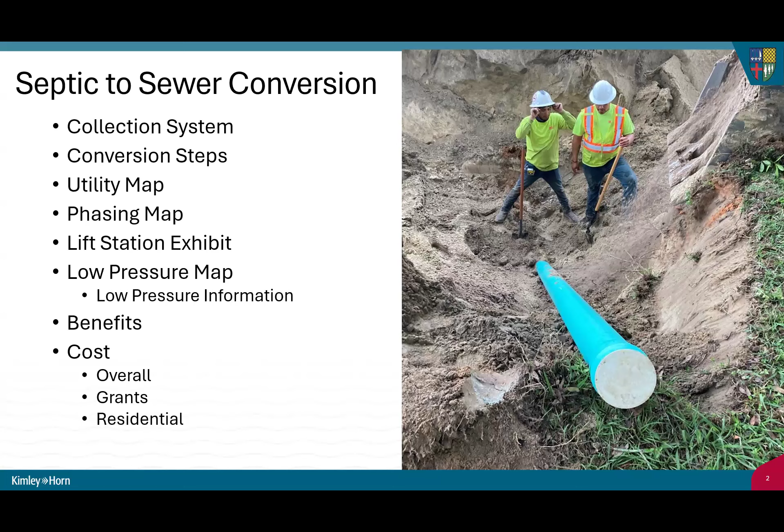We'll be describing the collection system components, the steps for converting from individual septic tanks to centralized sewer, showing a preliminary utility map, a recommended phasing map, a lift station exhibit, a low pressure map with some low pressure information, the benefits to connecting to centralized sewer, and go over some costs associated with it.

So the sewer collection system is made up of gravity systems, which are individual gravity mains and manholes, grinder systems, also known as low pressure systems, to help pump the flow over hills, and lift stations to send the flow to the wastewater treatment plant for further treatment.

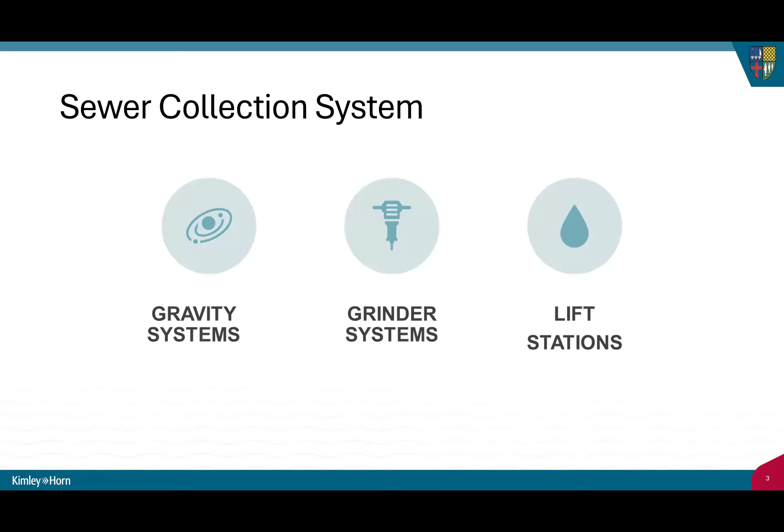Now the conversion steps will look like abandoning the individual septic tanks, connecting to the centralized sewer, installing lift stations throughout the town to pump the flow ultimately to Orange County Utilities' existing wastewater treatment plant for further treatment.

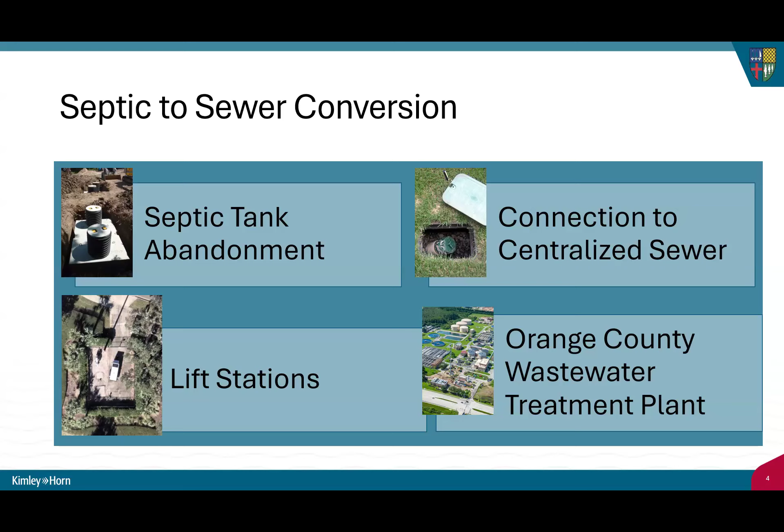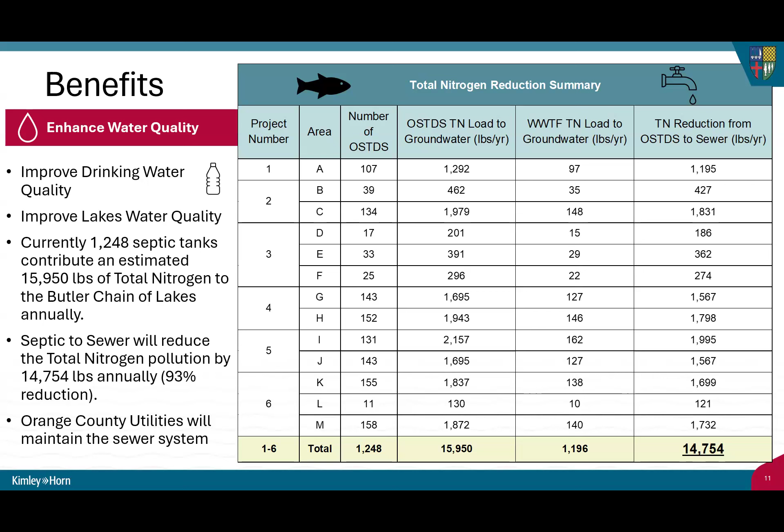Now I'm going to pass it on to my partner, Alan Gary, who's a technical expert in septic to sewer, to explain the overall costs and grants. Thanks, Briar. Happy to be here with you all tonight.

My objective in these next 4 slides is to explain the costs of the project to you, but also explain how those costs are not directly borne in their entirety by the town, and that's an important distinction to make. The slide in front of you has a lot of information on it. What we're trying to convey here is the 6 different phases that Briar talked about before, shown here in sequential order. They each have a varying number of septic tanks in them, but the number of septic tanks in them is proportional to what would constitute a good septic to sewer project.

We've incorporated into these cost estimates not just the collection system costs, but also the private property costs that might be incurred to run the sewer lateral from the house to the collection system and abandon the septic tank. So these are all-inclusive costs. On top of that, we include a 30% contingency because of the variability in the market we've seen, and the fact that we're probably several years out from designing and constructing these. We wanted to include a buffer.

Phase 1 has a $16 million cost. We've got 13 million for phase 2, 11 million for phase 3. Phase 4 is close to number 1 with 16 million. Phase 5, with the largest number of septic tanks—I'm sorry, phase 5 has a $19 million cost. It is more expensive than phase 6, which has the largest number of septic tanks, due to some of the difficulties with installation and the lift station locations.

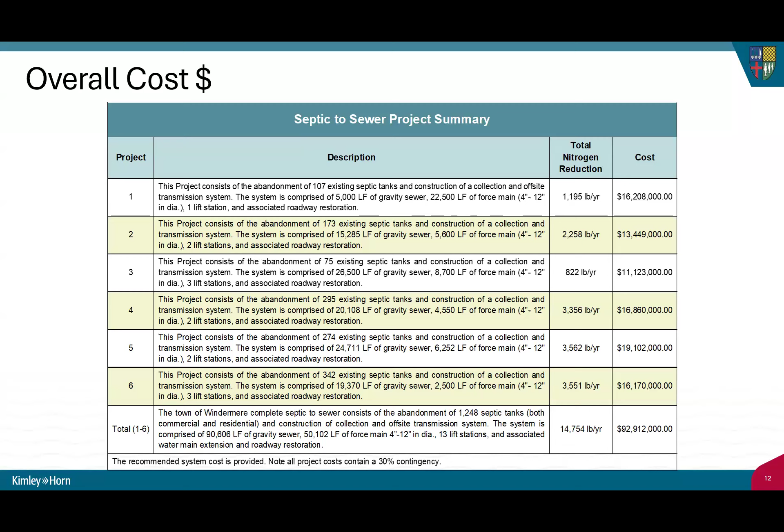My experience and our firm's experience with these projects is that overwhelmingly the vast majority of them receive something along the lines of an 80% grant-funded proportion, with 20% being paid by the township.

The grants have really been prioritized by the state and federal government to push clean water. Recently, Florida passed the Clean Waterways Act. The Army Corps contributes a lot of funding. There are federal clean water dollars available through the SRF program, and the Federal Clean Water Act also has some opportunities.

Now, that last one under the Federal Clean Water Act, the Section 319 grant program, is one I want you to keep in mind—I'll talk about it more on the last slide. But the point we're trying to make is there are a lot of funding opportunities available to you. The fact that your study got grant funded, in my experience, is a good indication that they'd be willing to fund the design and construction, the next phases of this project. This is an important water quality project, and I think the town has shown that it's proactive in trying to prevent nutrient pollutants to the water bodies.

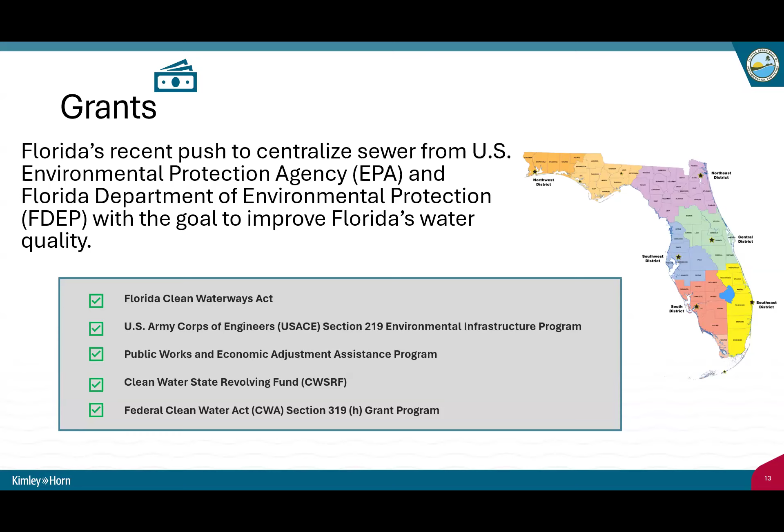Timing of the grant application is a factor in how much you might get. With a project like this, where we have 6 separate projects that can be broken up and phased properly, you're really looking at a septic-to-sewer program that can be funded through a multi-year grant. Several of the grant agencies I mentioned offer multi-year grant funding, so you only have to apply once. You get approved as a multi-year grant-funded entity, and then that grant is there and available for all 6 projects.

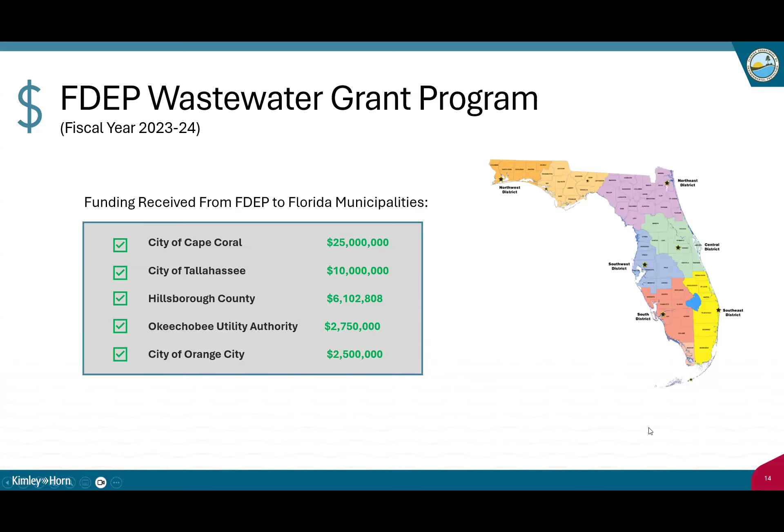Other costs a resident might incur, as I mentioned, are the construction costs on their private property to connect the house to the collection system and abandon the septic tank. With our typical projects, those costs usually run a total for the connection fees and on-site costs of about $6,000. What we've budgeted is for 10—again, we're overestimating a little bit at this stage just for market variability.

Now, remember that 319 grant I said to keep in mind—that particular grant is specific for covering these types of costs, the ones residents would pay. It doesn't pay for the collection system, but it will pay for the on-property costs. I've got several projects I'm working on right now where we've been able to take advantage of that grant, and the residents actually had no out-of-pocket costs. But as I said, the average across the board we've seen is about $6,000 total that a resident might see.

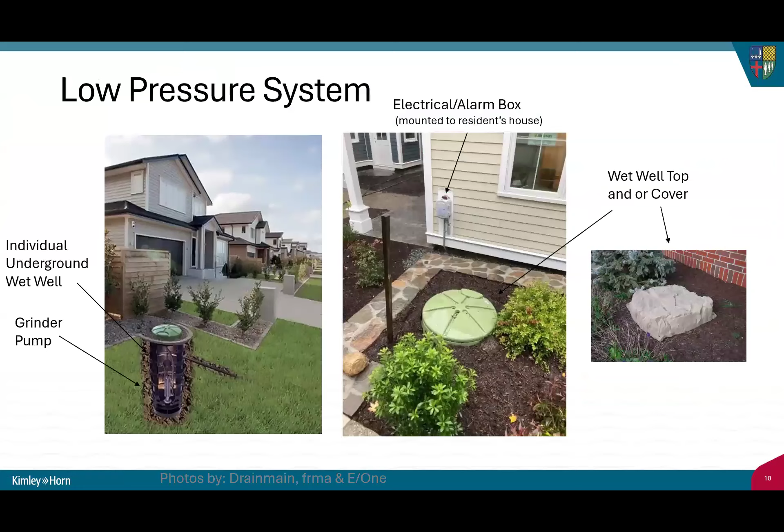Okay, and could you guys go back to the map that shows where the existing ones are? Because I know there's one at my daughter's elementary school in town. Is that not part of the Orange County utility system? There's one in the parking lot, and I didn't see it on there. It's not, Brandy. Okay, is it similar in size, do you know, Mayor, to what they're proposing?

If my memory serves me correctly, that is a different type of processing. They basically have like a large pumping station for their own septic. I don't believe that is a lift station per se. I could be wrong, but I think that's my memory.

Yeah, I'd be curious, because I've had a lot of people, when everyone stands at the school for walker pickups, it's near there. And we had situations at the school where it's failed, and there was debris across the yard and the sidewalk. And it's also very, very loud. So I've had a lot of people asking me, are these lift stations going to be as loud as that one that's at the elementary school?

So that would be something I guess people would want to know, like is there dBA ratings on this? Like you can buy a dishwasher that way. So is there something that says how loud these lift stations are, that have specs?

Yeah, lift stations aren't usually loud. I'm not sure what you're talking about. Yeah, so the one at the school is wild loud.

The only thing I can think of would be any backup power, like if a generator had to be exercised or bypass pumping or something, like a large structure that's outside the lift station itself. But regular operation, you shouldn't really see it or hear it or smell it or anything. It's kind of all underground and hidden.

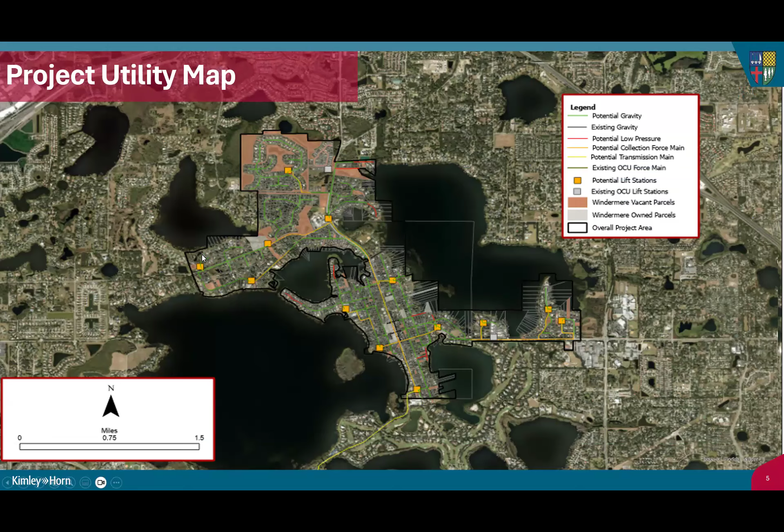Briar, can you go back to the standard detail? I don't believe that we are recommending any backup or requiring backup power at these. Typically with an emergency situation, that's one of the first ones they send generators to, and we work with the Orange County EOC.

Yeah, it's a lot of generators to get. There are other ways you could use HMGP to mitigate those as well, potentially, but it is important that everyone understands that if you lose power and there is not a generator available to back that system up, you have a finite time that you will have sewer, if at all. So it's something we probably should discuss and know. I know it adds cost, but it's something we ought to discuss, just so everybody is aware.

The other item, and I just want to do this for clarification purposes because I think there's some confusion potentially. The lift stations are maintained by Orange County. Those grinder stations, or whatever they are, are the responsibility of the property owner. Is that correct? Because that's the way I understood it, but I just want to clarify and make sure everybody has the proper information.

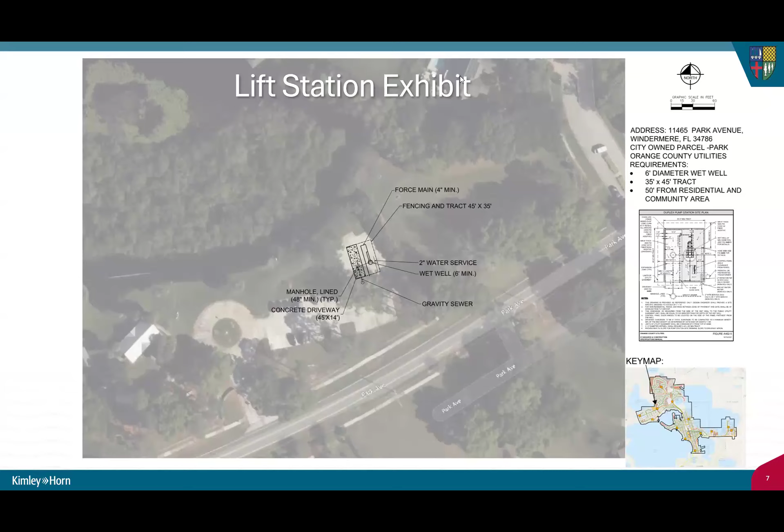Okay, yes, good, always good to ask the questions, that way we try to get all of them. Any additional questions? All right, thank you guys, we appreciate that and good presentation.

All right, well thank you Mayor and Town Council, again I'm Brad Cornelius with Wade Trim. Brad, real quick, can you start the slideshow? Oh, I didn't do that. Upper left-hand corner. Let's see, this will go to next. What is it? This one, okay. There you go, Brad, thank you. Got it? All right, thank you. One day I'm gonna get this down.

So thank you again, Mayor and Council. Again, I'm Brad Cornelius with Wade Trim, and I have with me Chris Thompson, our landscape architect. So what we want to do with y'all this evening is give you our draft concept plan, based on the town square charrette we did back at the end of October, as well as information we received through an online survey open through most of November. We also had a meeting with the Long Range Planning Committee that provided input into this concept plan. First, I want to remind everybody what our scope is in this project. Our specific scope is to analyze the existing conditions and uses of town square, that's our first step. What's important for everybody to understand, and I know we talked about this at the charrette, what our project does not include is any changes or proposed changes to town hall. Our focus is on the town square park area, not on changes or adjustments to town hall, as that's a whole separate process and project. So that's important for everybody to understand.

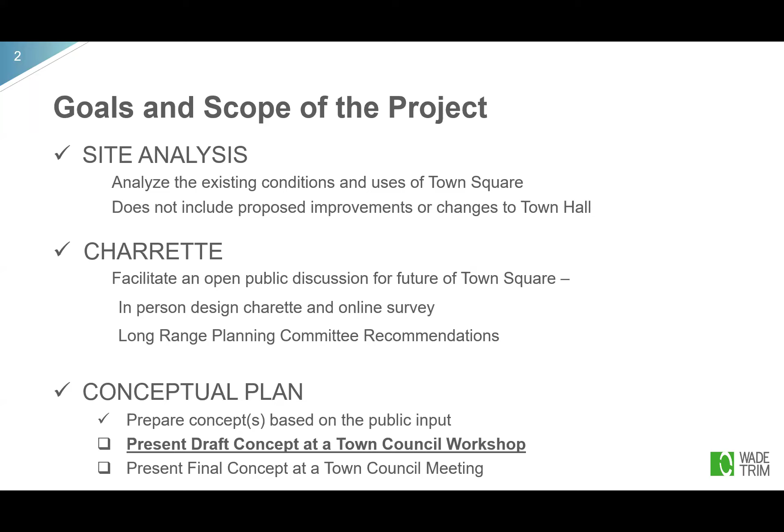As I said, we started with the site analysis. This was work that Chris did. I won't go over this, but as you can see, he looked at the existing uses that are there, and the existing characteristics of the park and the surrounding area, to give us our starting base.

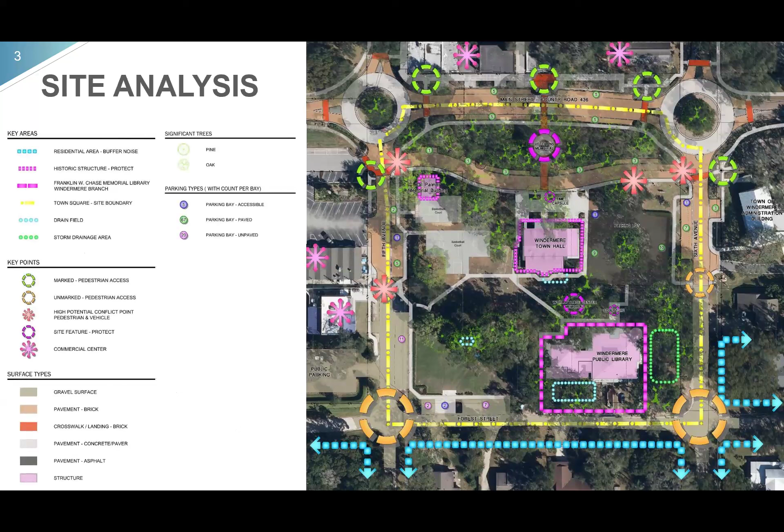Then again, we had our charrette. We had 34 people sign in. I'm sure there were more than that there, but that's how many signed in to our charrette. I really appreciate everybody participating in that meeting.

We also had the online survey, which we started right after the charrette. I believe it was open until mid-October or mid-November. We did receive a total of 244 responses, and of those, 230 were from residents of the town.

I will note here too, because we have all the data in the agenda item, all the responses, everything is in there, and you may see we got some goofy responses from some people. It's okay, because this data we collected is not scientific. It's information we use to develop a concept plan based on Chris's design professional background, as well as for you as town council to have some reference for a decision you all might want to make. But it's not directive and it's not a vote, it's just information to be considered.

As I said, in your agenda item we have a whole summary report of all the information that was collected through the charrette and the survey. So that is available to anyone to take a look at as part of this agenda item.

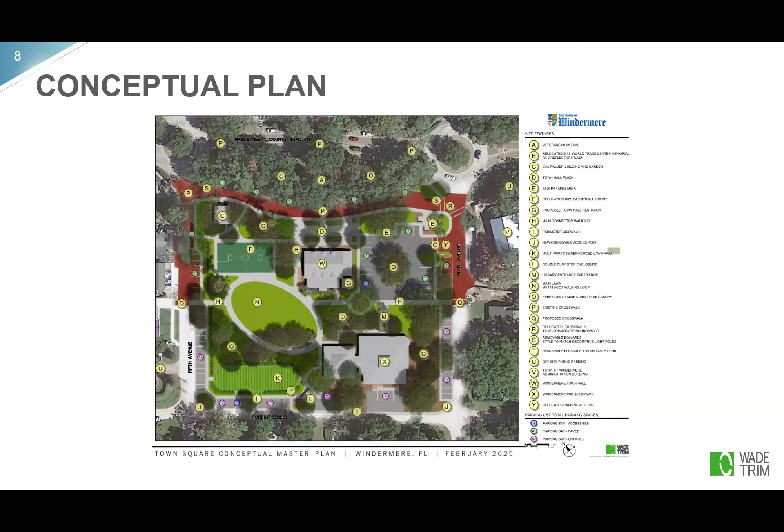Starting at the top right, Brick Main coming off 6th, we have planned for removable bollards to create a vehicular-free zone on Brick Main, and it would go on both sides at 5th and 6th, just by the crosswalks, so that could be used similar to the way it is now with many events that happen, or for any events that happen in the future.

The relocated 9/11 memorial is shown placed right there at the corner. It's a visible location, and it becomes a welcoming entry point to the town square. The main parking lot access has been relocated to 6th Avenue off of Brick Main, so that when Brick Main becomes a pedestrian-only zone, cars can still access the parking lot without any issue.

If needed, there's an area at the north side of the parking lot for bike racks to be located, should they ever become a necessity to be at Town Square, a place for bike parking.

Town Hall Plaza, right there in front of Town Hall, would be maintained in its current location and just have some expanded landscape areas, as well as widened walkways along the edge to provide more access into the heart of Town Square.

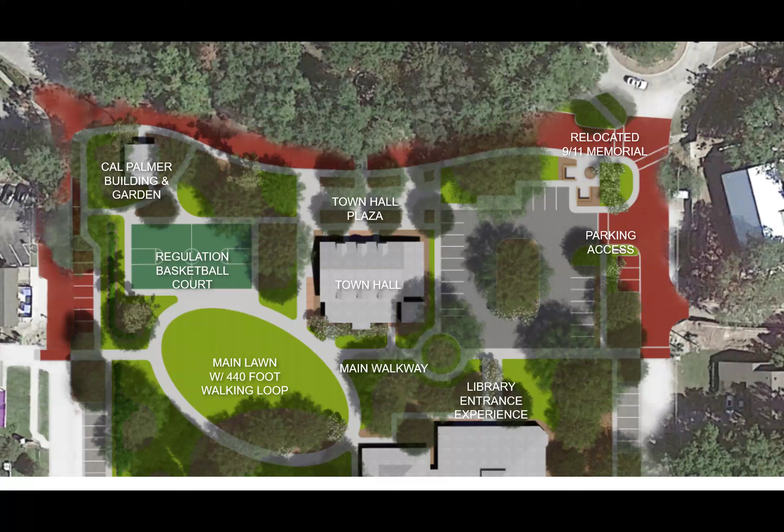Buffered from the main lawn and surrounding the residential community, a reinforced natural lawn area would provide space for small events. It could be an additional area for larger events, and it could also be a potential area for small vehicle or golf cart parking if needed.

Some additional improved gravel parking is located just below that, and a mountable curb and removable bollards would provide controlled vehicular access into this area, the buffered multi-purpose reinforced lawn area.

Between that and the library would be a dumpster enclosure. The dumpster station is designed for 2 full-size dumpsters, and they would be placed in an architecturally designed enclosure so that they fit the quaintness of Town Square and did not detract from anything or any of the improvements going on there.

Additional gravel parking behind the public library for employees, as well as a loading zone, is shown on this plan. And also additional gravel parking for visitors, which is provided along 6th Avenue.

You may notice there's a sidewalk connecting all of the town square around the entire perimeter, and this would make a complete loop, allowing for connections to any part outside of the square as your residents come to events or come to activities at the square.

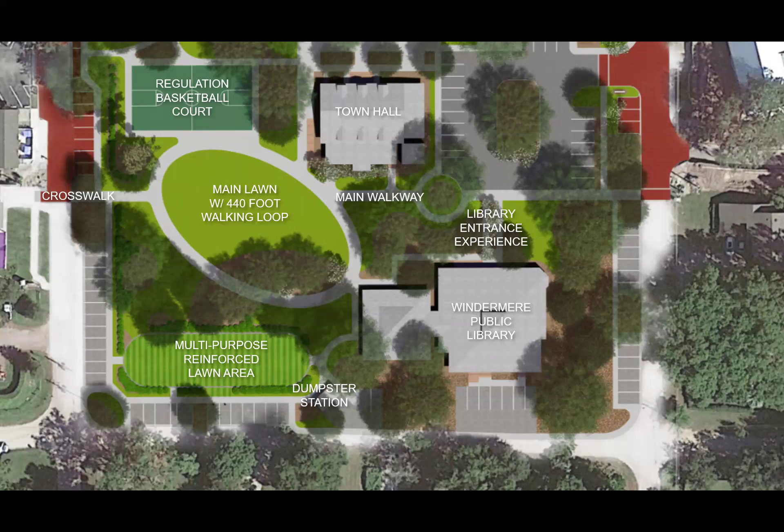This is just an overall view again of the planned improvements in the conceptual master plan.

And with that, I would like to open to any questions you may have. Yep, Mayor and Robert, that's our presentation. We'd be happy to answer any questions or give you more information.

Or get comments on changes you may want to see. Thank you, Brad. If the town council can raise their hands, I'll be more than happy to call you one by one.

Is only town council allowed to respond, Robert? It's Joan Foglia. It's a town council workshop, so it's at the discretion of town council whether to include public comment.

That's perfect. So when does the community get their second chance at discussing any of these proposed improvements? It would be whenever it comes in front of town council. But the workshops are meant for town council to discuss things amongst themselves, just to get a better understanding of what's going on. Right, but the community should also have the opportunity to put more input other than just one charrette, right?

And it is our community and our town square, correct? Or am I wrong? Well, I totally understand. Yes, the charrette and the survey were the two opportunities for the public to provide their input. And this is a combination of their input.

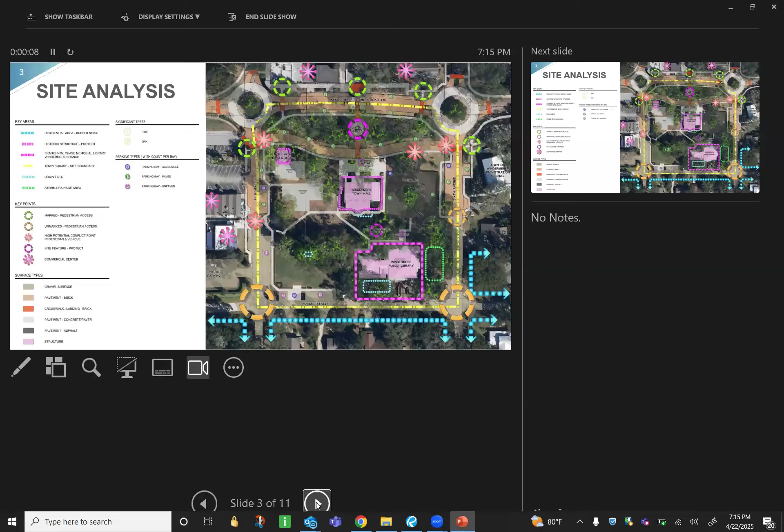Sure. So I will make sure that everyone gets to add input. We're going to have plenty of input, but let's not ruin a very good plan that we have an opportunity to potentially make even better. And I need to explain to you that while I understand a lot of people said no parking, parking is never a popular thing. It is a reality of the world we live in. And we do have to include it when we do good planning, because good planning includes golf cart parking, bike parking, pedestrian, and vehicle parking. It's just good practice. So let's not get too ridiculous about saying we're not listening to people. We have to plan accordingly. It's the first version of a plan. Let us give some input on it. You've given yours. I hear you.

But also, I want to make sure people understand that if you squeeze parking from here, you're actually going to then put parking in people's front yards on town right-of-way. And that's what we're trying to avoid, because that, I believe, is more important than not having parking here. Now, we'll get additional input and we'll find out if that's true or not. But I bet it is. I'm pretty sure, because I've spoken to all those people and they don't like people parking out in front.